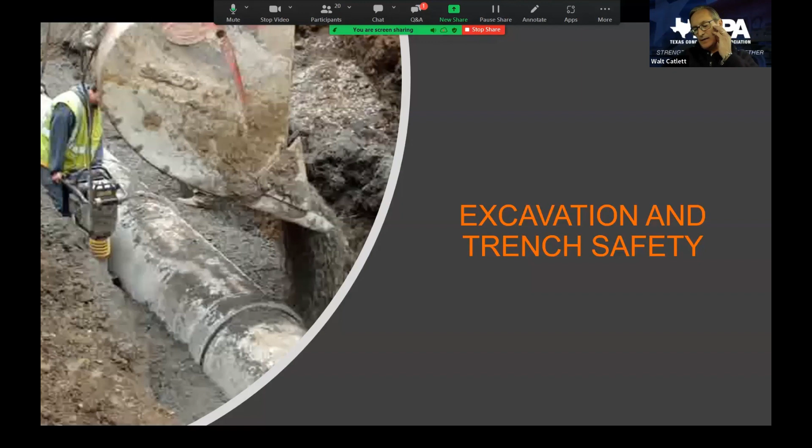As Mark said, I'm with the Texas Concrete Pipe Association, and I am a certified safety and health official with OSHA on the construction industry side. So the items we're going to be talking about come from OSHA, and I'm going to highlight a few things as we go along that point us to the federal document this information comes from.

So often we are out on the job site or in a classroom and someone asks us, at what depth do we need protective measures in place per OSHA? And we get all kinds of answers, a couple of different answers. So what I want to do today is raise our awareness about that and make it so we're comfortable with that conversation. Here are our learning outcomes I want to accomplish today.

We're going to describe the differences between an excavation and a trench. I would think most of us on this call would know that, but that's one of our outcomes. Describe the dangers of trenching and excavation operations. Identify steps to avoid hitting underground utility lines. Describe protective systems, explain requirements for safety when installing and removing protective systems, and describe other excavation hazards. So those are our learning outcomes.

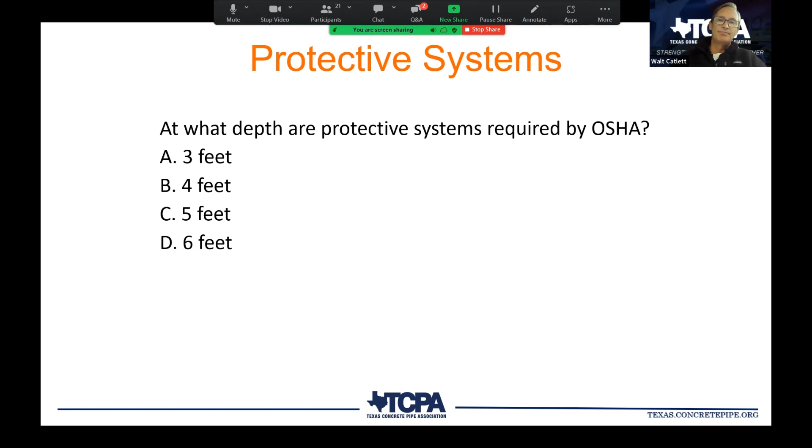If you haven't ever done that, at the bottom of the page you'll see an icon for chat. Click on it and you can type your answer in there. Mark and Mike, let me know if I need to touch on anything there. At some point during the presentation, we'll get back to that. So we had a couple people answer, and we have more than that in the room. So y'all step out there and be brave and go ahead and throw an answer for the heck of it.

1926.650, .651, and .652. Then it has appendices A through F, and I just kind of lumped those together.

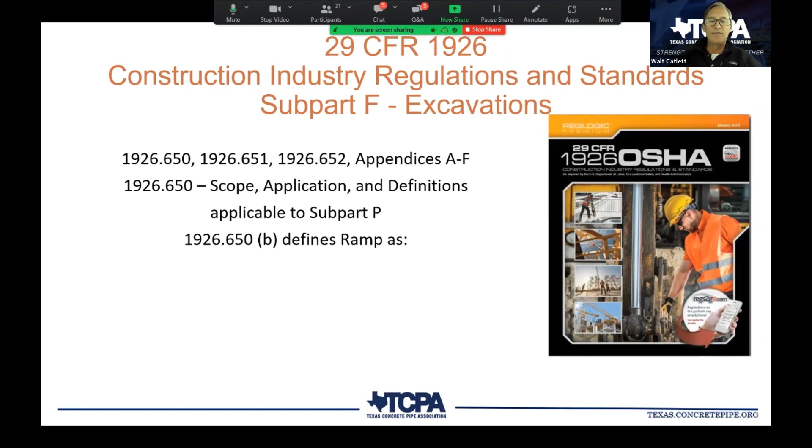Within 650, 1926.650, they address the scope, application, and definitions applicable to subpart P. So there'll be a handful of definitions: trench, competent person, hazards, just some basic things that apply to trenching. They even have a definition of a ramp. Now, if we were in a classroom and I were to ask you, the group, give me your own definition of a ramp, we'd get all kinds of different answers. And here's OSHA's answer: a ramp means an inclined walking and working surface that is used to gain access from one point to another. You can see what it can be constructed of. Typically, when we think of a ramp, it might be earthen, made of earth materials. But anyway, here's their definition within 1926.650.

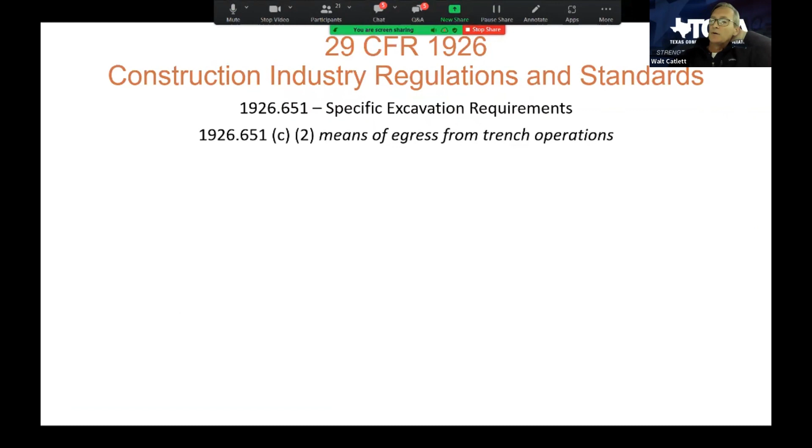Within 1926.651, they're going to touch on specific excavation requirements. So sometimes when I ask the question, at what depth do we need to have protective measures, a lot of times people will say, probably a 50-50 split, they'll say 4 feet, or they'll say 5 feet. And so I always say, well, you're kind of both right. But the reality is, at 4 feet, OSHA tells us we have to have a means of egress from a trench operation.

And here you see it before us, straight out of 29 CFR 1926 subpart P: a stairway, ladder, ramp, or other safe means of egress shall be located in trench excavations that are 4 feet or more in depth, so as to require no more than 25 feet of lateral travel for employees. So what OSHA is telling us right there is, if I have a trench and it's 4 feet or greater, I've got to have a means of getting in or getting out of that trench.

It could be a ladder, or it could be a stairway. And that means of getting in and getting out of the trench can be no further than 25 feet from me. So if I got a 50-foot trench, or if I have a 60-foot trench, I'm gonna have to have a couple ladders in that trench to get in and get out safely. And we've all been out on the job site and seen trenches lengthy with probably only one means of getting in and getting out. OSHA tells us every 25 feet we need to have that ability.

All right, that was 1926.651. There's a bunch of other things in there. Now I'm going over to 652, and these are the requirements for protective systems. So 651 covered the means of getting in and out of a trench, and that's at 4 feet and greater. OSHA tells us for protection of employees in excavations, each employee in an excavation shall be protected from cave-ins by an adequate protective system, except when the excavation is made entirely in stable rock or the excavations are less than 5 feet in depth.

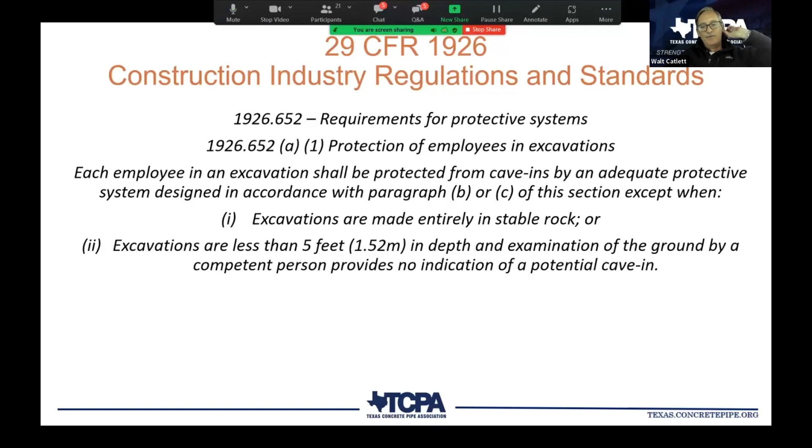An examination of the ground by a competent person provides no indication of a potential cave-in. So there's our answer: at 5 feet or more, OSHA tells us we should have protective systems in place. 5 feet or more. Now keep in mind that OSHA standards are minimal standards, those are the minimums. So a local agency can say, well, okay, OSHA says 5, but we want it to be 4 foot because of these reasons. They can make the standard more conservative, they just can't make it less conservative. 5 feet or more, you'll try to remember that because you'll be asked again in the future.

All right, then within Appendix B, you've got appendices A through F. I'm just throwing some things up there for us to look at. Within Appendix B, under the sloping and benching configurations, which are 2 protective measures, sloping being one and benching being another, you can see what they're telling us the configuration of our slope and or bench system should be. So sloping here, they're telling us in a type A soil it has to be 3/4 to 1. Type B is 1 to 1, and type C is 1.5 to 1. And we'll go over those different soil classifications during the presentation.

And so what that's telling us is for every 9 inches of horizontal distance, I've got to have 12 inches of depth for type A.

And for type C, for every 1.5 foot out horizontally, I can go down 1 foot, or up depending on how you're looking at that. All right, so those are our slope configurations.

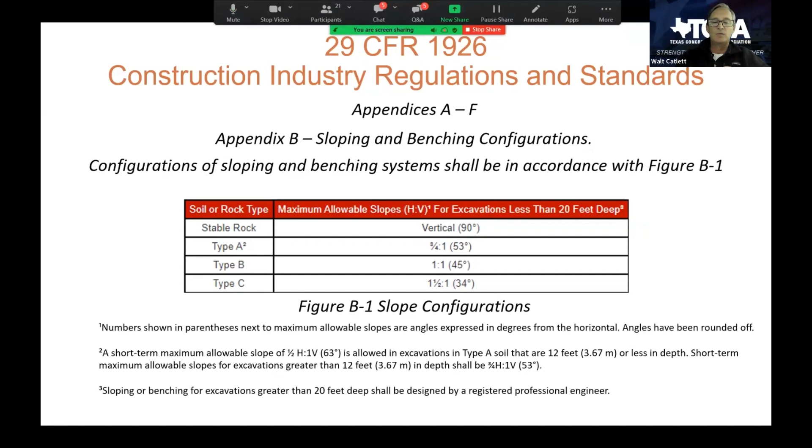And then within that appendices, these notes are below it as well. There's 2 key notes here, well, 3 I guess, but the one at the bottom is what I want to focus your attention on: sloping or benching for excavations greater than 20 feet deep shall be designed by a registered professional engineer. 20 feet, greater than 20 feet, we have to have a PE design our sloping or benching for excavations. So that's worth noting as well, that's another dimension worth capturing.

Is the excavation more than 5 feet in depth, yes or no? If the answer is no, then I check: is there potential for cave-in? If the answer remains no, then excavation may be made with vertical sides, less than 5 feet in depth. If the answer is yes, they're going to have to slope, shore, or shield that trench.

So I'll have to put some type of protective measure in place. If we select sloping, then we'll go to figure 2, and it walks us through the different things for sloping, and it's all based on soil classification, whether it's type A, type B, or type C soil. And then our other options are shoring and shielding, shielding being another term for what we'd be familiar with as trench boxes. All right, so those are our 4 protective measures: sloping, benching, shoring, and shielding.

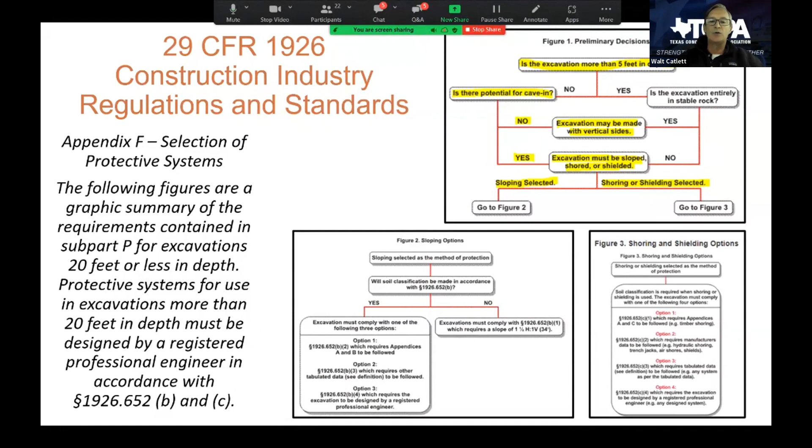All right, so that's 29 CFR 1926, some of the items that are in subpart P. P as in Papa. All right.

So what is a trench and what is an excavation? A trench is defined as a narrow excavation made below the surface of the ground. In general, the depth of the trench is greater than its width, but the width of a trench is no greater than 15 feet. This is all laid out in OSHA's manual. We all would say, well, anybody knows that. Well, OSHA feels it's important to define it. And if OSHA feels it's important, I guess if we're in the world of installing pipe or out inspecting our job sites that we've designed, we probably should be familiar with that terminology as well.

There's a handful of hazards that we are exposed to when we go out into the field and there's trenching or excavation. The biggest one here is cave-ins. Cave-ins certainly pose the greatest risk and are more likely than some other excavation-related incidents that result in worker fatalities.

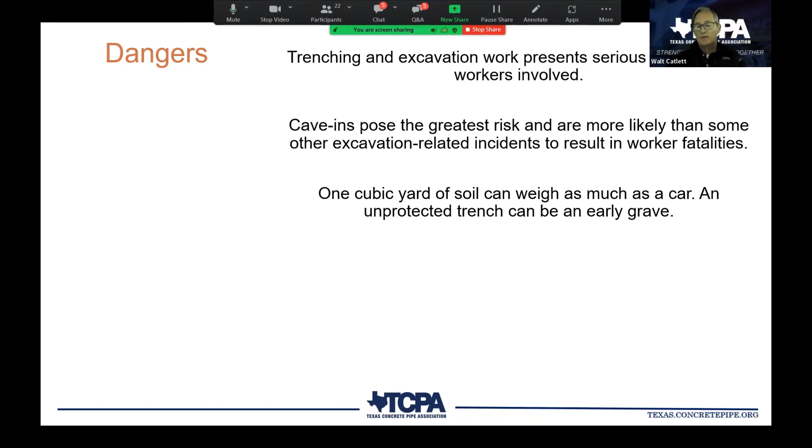I'm sure a handful of you have heard this before, but 1 cubic yard of soil... so if I'm in a trench and it's 4 foot in depth, I don't have to have protective measures. If a competent person said, 'Yep, we're good on the 5 foot deal because it's 4 foot and the soil's stable enough,' we're comfortable with that.

And then I bend down to pick up a tool, and I got a 3 foot wall of dirt that falls on top of me. I'm in a serious situation because I have about 3,000 pounds, a bit more than 3,000 pounds on top of me. So that's pretty tough. We got to make sure our employers ensure workers enter trenches only after adequate protective measures are in place. This is a big one.

I come from the concrete pipe world, and suspended loads are something I see on the job site every time I go to the field. And an 8 foot long by 36-inch diameter pipe, if that chain or strap or cable snaps and it falls and drops on top of this person, we're going to have a fatality on the job.

So if you're out in the field and you see someone underneath a suspended load, point it out to them, and you may potentially save their life, or you may prevent them from a life-changing accident.

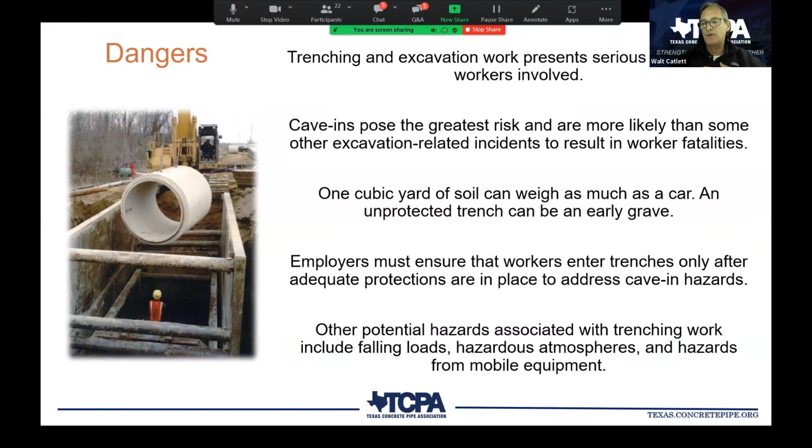All right, so what do the standards cover, and how do they protect workers? We're going to walk through that.

The whole reason we have OSHA is to protect the American workforce. That's what it's there for. It came about in 1972. Richard Nixon and the Congress at the time signed it into law. And so since '72, 50 years ago, we signed it into law, and we've had OSHA since then. And it was set up to protect the American workforce.

I don't really show it on here, but this is a good takeaway. OSHA has what's called the General Duty Clause, written within the standard. It basically tells us that employers have the responsibility to make sure the workplace is safe for their employees. We call that the General Duty Clause, and there are two parts to it: the employer part and the employee part. The second part is that the employee, him or herself, is responsible for following all the rules and regulations that are in place to make the workplace safe. So the employer has a responsibility, as does the employee.

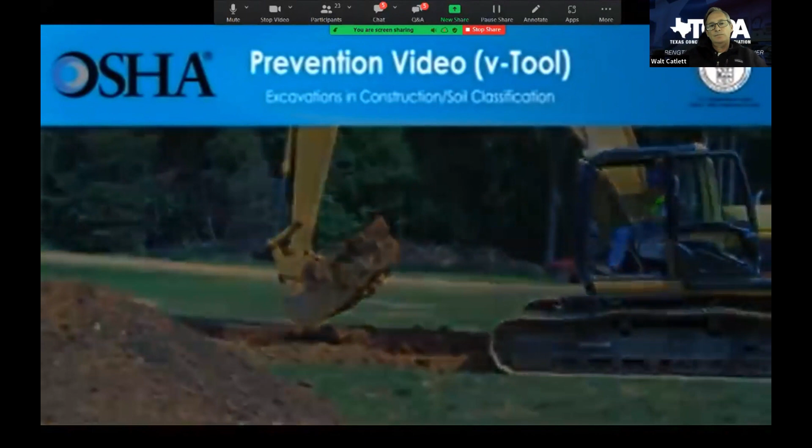In the U.S., more than 800 construction workers die every year while on the job. One of the most dangerous types of construction work is trenching, which kills 40 construction workers every year. Workers can suffer death or serious injury within minutes of being caught in a trench cave-in. But these deaths can be prevented. The video you're about to see shows one of the steps, classifying soil, that employers must follow so that trenching work can be done safely.

This video is not intended to be a complete educational tool. Instead, it is meant as an introduction for people who want to know more. Employers have a responsibility to provide a safe workplace and required protective equipment. You'll learn how having the right information about a construction site can help save lives.

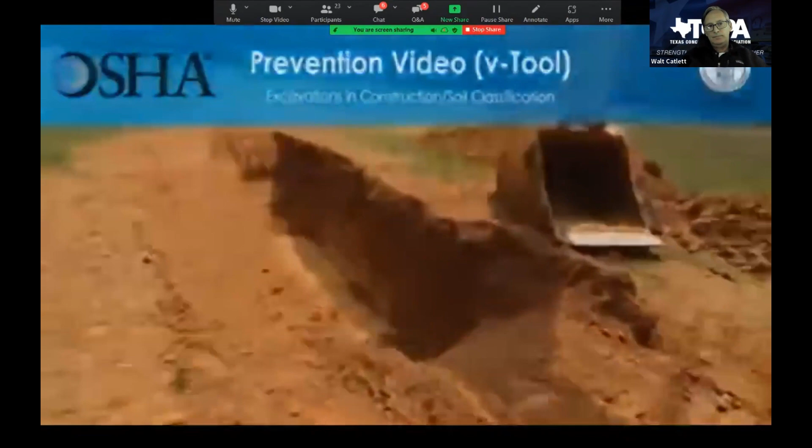Each employee who enters a trench must be protected from cave-ins by a protective system if the excavation is 5 feet or greater in depth, unless it is dug into stable rock. A support system is not required if the trench is less than 5 feet in depth and an examination of the ground by a competent person provides no indication of a potential cave-in.

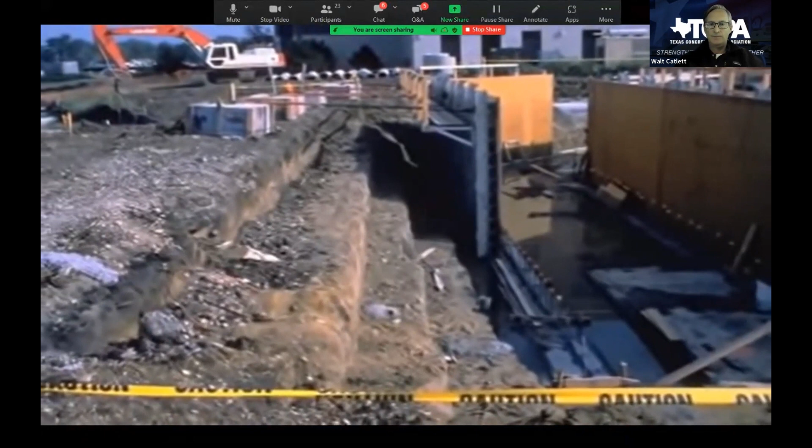One cubic yard of soil can weigh as much as a car, 3,000 pounds, and comes in many varieties. Some types of soil are stable and some are not. When digging a trench, it's important to know the type of soil you're working with so you know how to properly slope, bench, or shore the trench. This can help prevent a cave-in.

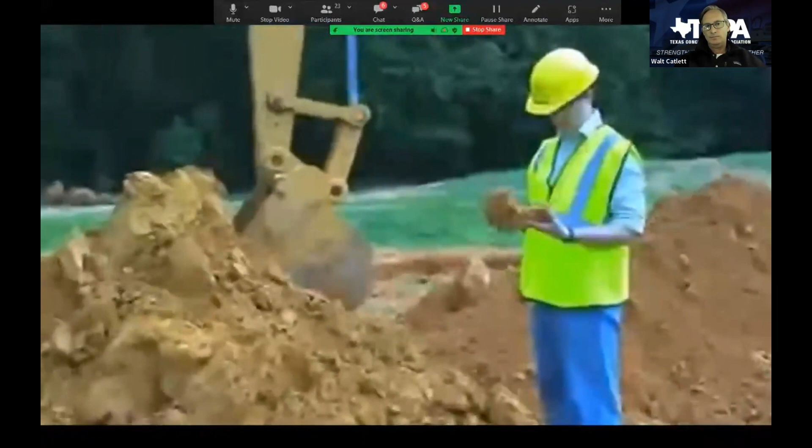OSHA requires that employers have a competent person to determine the soil type. A competent person is someone who can identify conditions that are hazardous to employees and who also has the authorization to correct these hazards. Anyone digging 5 feet or deeper must follow OSHA's rules.

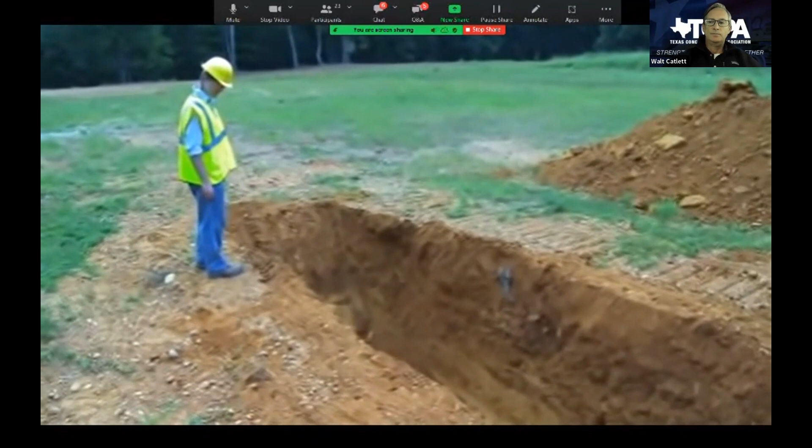The appendices of the OSHA excavation standard show the various types of support systems that may be used, up to a maximum depth of 20 feet. Any excavation deeper than 20 feet must use a protective system approved by a professional engineer. For all excavations, a competent person must conduct a full inspection every day, or when any trench conditions change, to identify and remove any potential hazards.

In this video, you'll see how a visual inspection of a construction site's soil is performed. You will also see how to test the soil using 3 of the most common methods: the plasticity test, the thumb penetration test, and the pocket penetrometer test. For best results, OSHA recommends that the competent person use more than one of these methods to test the soil.

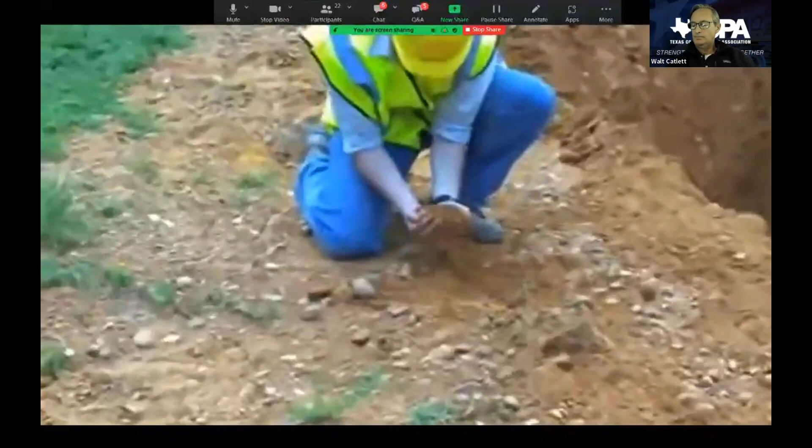Knowing the type of soil makes it possible to determine the right protective system to keep workers safe when they're working in an excavation. Soil can either be cohesive or granular. Cohesive soil contains fine particles and enough clay so that the soil will stick to itself. The more cohesive the soil, the more clay it has, and the less likely a cave-in will happen. Granular soils are made of coarse particles, such as sand or gravel, and will not stick to itself. The less cohesive the soil, the greater the measures needed to prevent a cave-in.

OSHA uses a measurement called unconfined compressive strength to classify each type of soil. This is the amount of pressure that will cause the soil to collapse.

This value is usually reported in units of tons per square foot. Soils can be classified as Type A, Type B, or Type C.

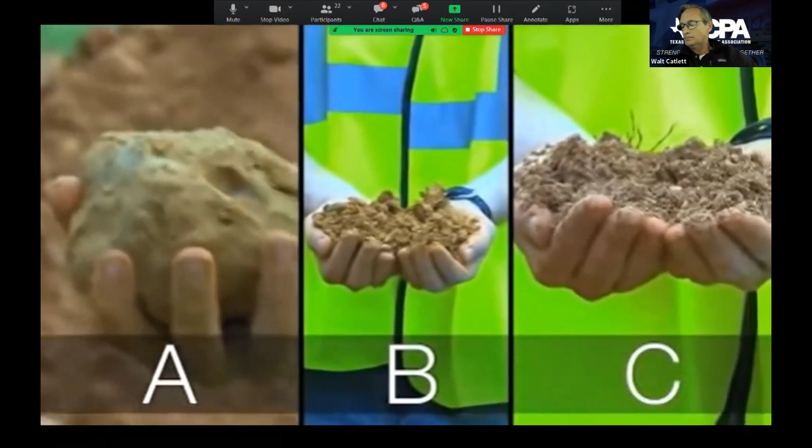Type A soil is the most stable soil in which to excavate, while Type C is the least stable. It's important to remember that a trench can be cut through more than one type of soil. Let's look at each type of soil.

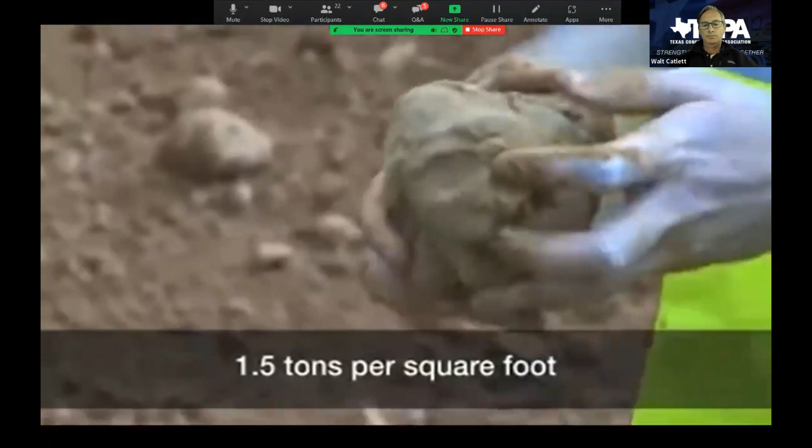Type A soil is cohesive and has a high unconfined compressive strength, 1.5 tons per square foot or greater. Examples of Type A soil include clay, silty clay, sandy clay, and clay loam.

Soil cannot be classified as Type A if it is fissured, if it has been previously disturbed, if it has water seeping through it, or if it is subject to vibration from sources such as heavy traffic or pile drivers.

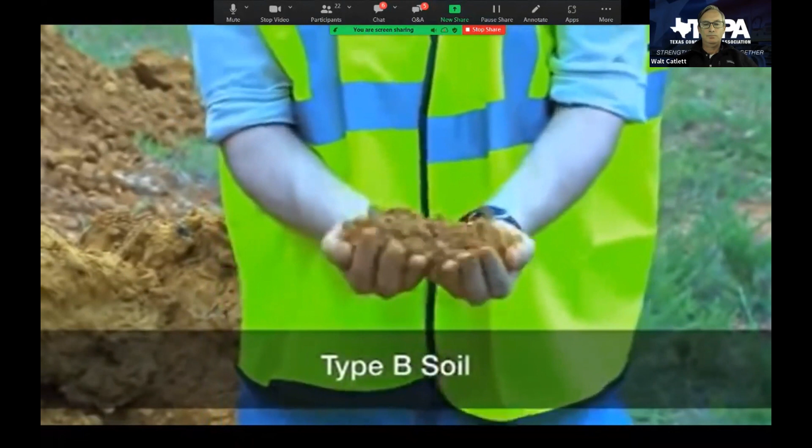Type B soil is cohesive and has often been cracked or disturbed, with pieces that don't stick together, as well as Type A soil. Type B soil has medium unconfined compressive strength, between 0.5 and 1.5 tons per square foot.

Examples of Type B soil include angular gravel, silt, silt loam, and soils that are fissured or near sources of vibration, but could otherwise be Type A.

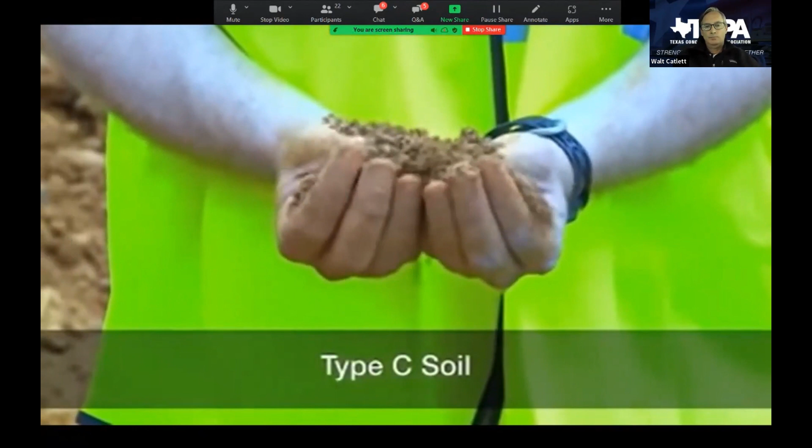Type C soil is the least stable type of soil. Type C includes granular soils in which particles don't stick together, and cohesive soils with a low unconfined compressive strength, 0.5 tons per square foot or less.

Examples of Type C soil include gravel and sand. Because it is not stable, soil with water seeping through it is also automatically classified as Type C soil, regardless of its other characteristics. Before testing the soil, it's useful to perform a visual test of the construction site.

This will help determine if there are factors on site that will lower the strength of the soil. Here are some observations to make when performing a preliminary visual test of the soil around an excavation site.

First, as the soil is being excavated, does it come out in clumps or is it granular? Clumps mean that the soil is cohesive. Are there sources of vibration near the excavation? Are there signs of previously disturbed soil, such as utility lines?

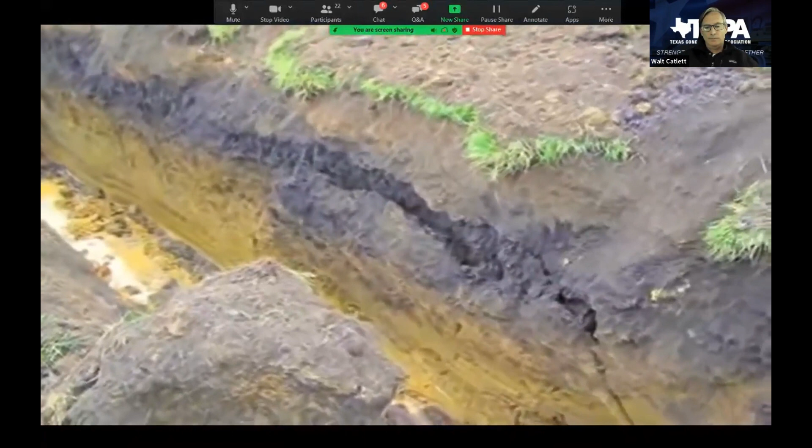Are there signs of water seeping through the soil? Is the soil fissured? Signs of fissuring include crack-like openings or chunks of soil that crumble off the side of a vertical excavation wall.

If any of these conditions are met, the soil cannot be classified as Type A. When performing a soil test, it's important to choose a good soil sample. Soil samples should be typical of the surrounding soil in the excavation, and additional samples should be taken as the excavation gets deeper.

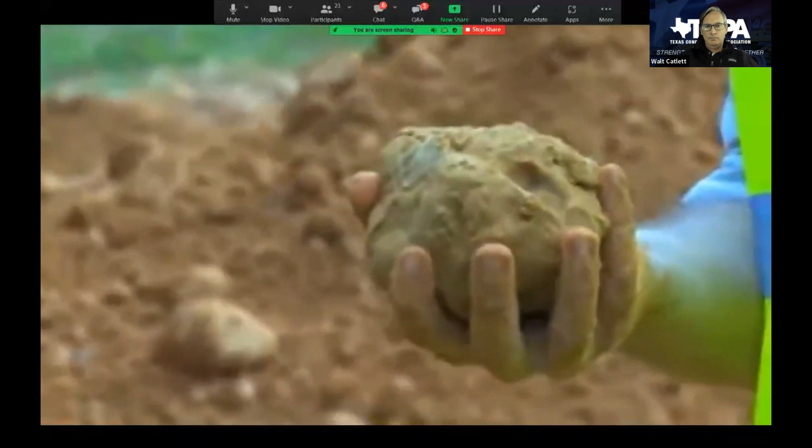While the excavation wall is one place to take samples, OSHA recommends taking a large clump from the excavated pile, as long as the soil in the pile is fresh and hasn't been compacted.

Test results can change as the soil dries out, so for the best results, samples should be taken and tested as soon as practical. Now let's look at the three main types of soil tests.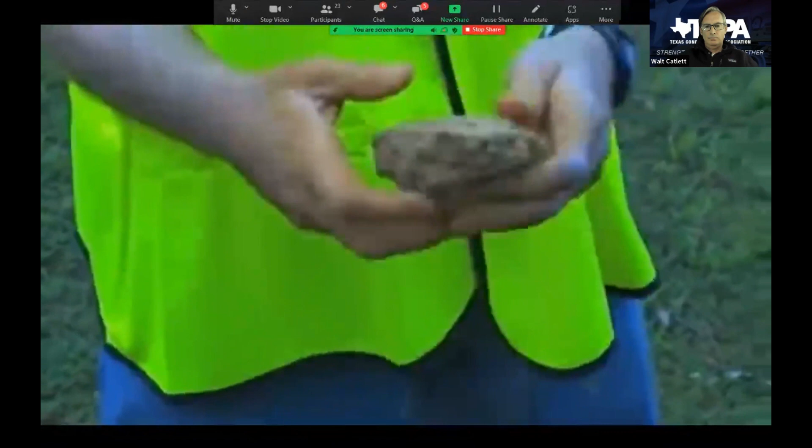The plasticity test, which is sometimes called the pencil test, is used to determine if the soil is cohesive. This test is performed by rolling a moist soil sample into a thread that's 1/8 of an inch thick and 2 inches long, resembling a short, slim pencil.

If the sample can be held at one end without breaking, it is cohesive. Here's an example of what the results will look like if the soil is cohesive. Notice how the sample stays in one piece.

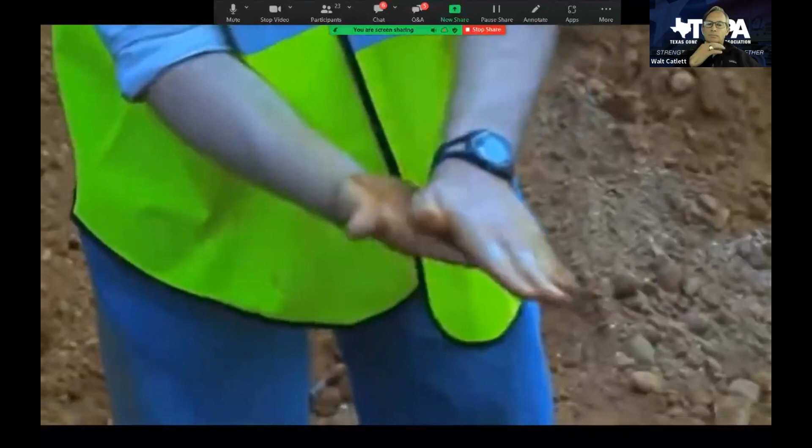Now look at what happens when the soil is not cohesive. The soil doesn't have the strength to hold itself together. Any soil that is not cohesive is automatically classified as Type C, although some Type C soils are cohesive.

The thumb penetration test is used to quickly estimate the compressive strength of a cohesive soil sample. To perform the thumb penetration test, simply press the end of your thumb into a fresh clump of soil. If the soil sample is Type A, your thumb will only make an indentation in the soil with great effort.

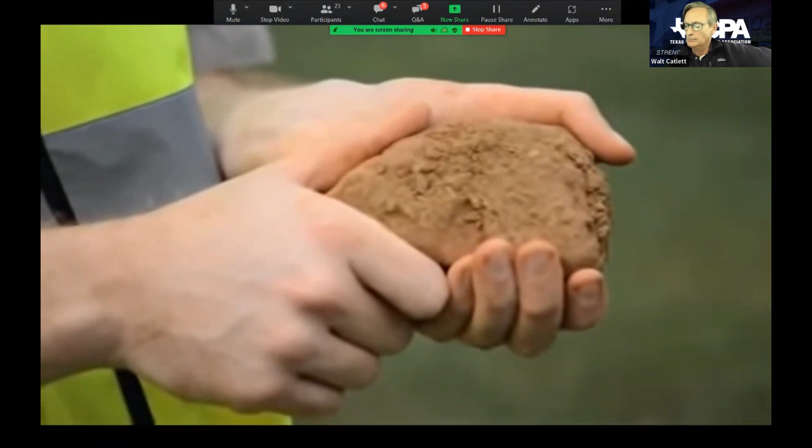As you can see demonstrated here, if the soil sample is Type B, your thumb will sink into the soil up to the end of your thumbnail, just like this. If the soil sample is Type C, your thumb will sink all the way into the soil clump.

As you can see here, your results for this test will probably be somewhere in between these results.

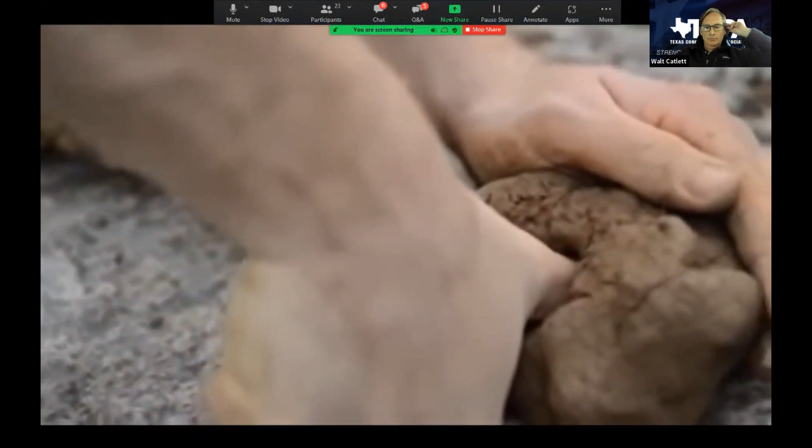For a more numeric measurement, the pocket penetrometer test can be used. A soil's compressive strength can be given a numeric value by using the pocket penetrometer test.

There can be some variability in these results, so it's a good idea to run this test on a few soil samples from the same part of the excavation, just to make sure your results are consistent.

A pocket penetrometer works much like a tire pressure gauge. A thin metal piston is pushed into a soil sample, and the penetrometer records the compressive strength of the soil. Be sure that the scale indicator is inserted into the penetrometer body until only the 0 mark is showing. To conduct the test, push the piston into the soil until it reaches the engraved line. Then simply take the reading from the scale indicator.

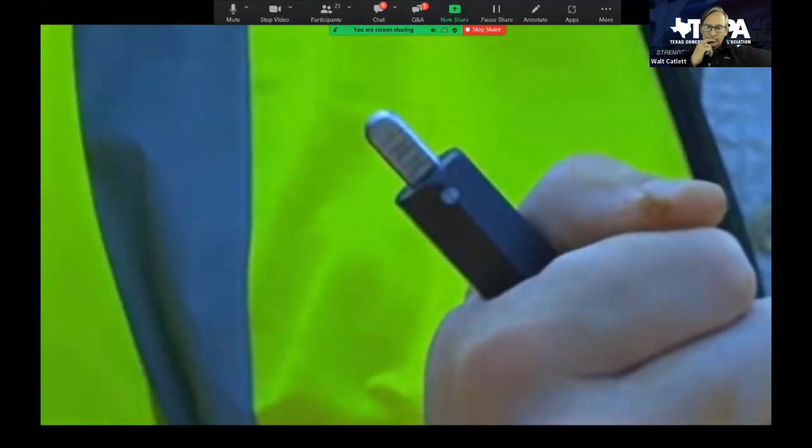It's important to recognize that a penetrometer may give false results if the soil contains rocks or pebbles, which won't compress. As you can see, type A soil will measure at least 1.5 tons per square foot. Be aware, however, that you can't classify a soil as type A if the excavation site didn't meet all the conditions of the visual test, if it is granular, near a source of vibration, or there are signs of previously disturbed soil, water seepage, or fissured soil.

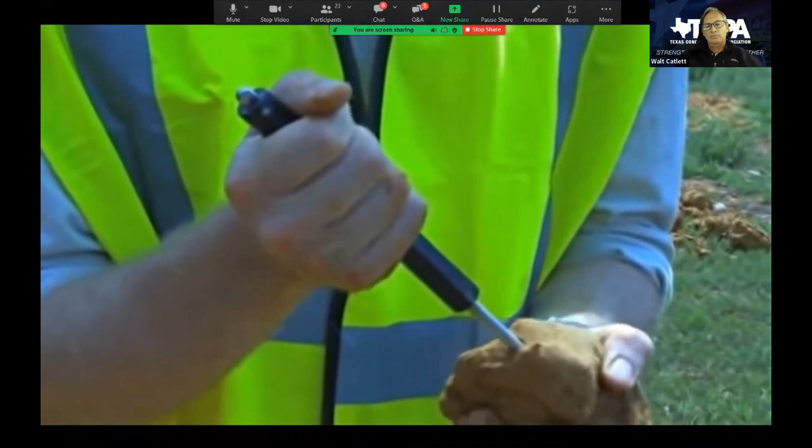For type B soil, the reading will be between 0.5 and 1.5 tons per square foot. Type C soils are equal to or less than 0.5 tons per square foot.

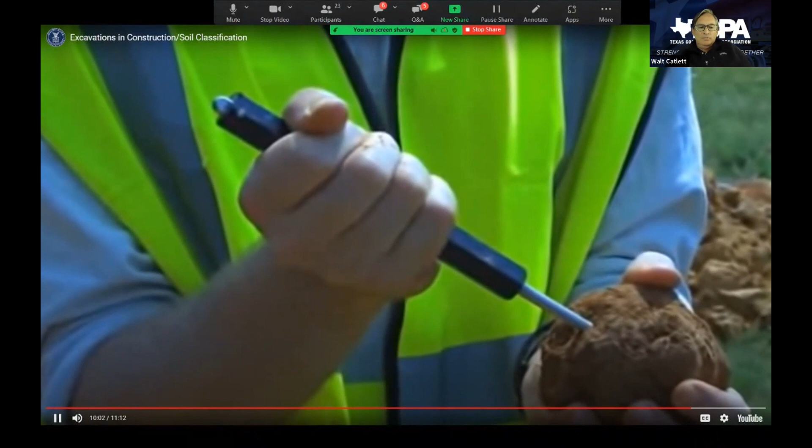Let's review the main points from the video. OSHA classifies soils into three main groups.

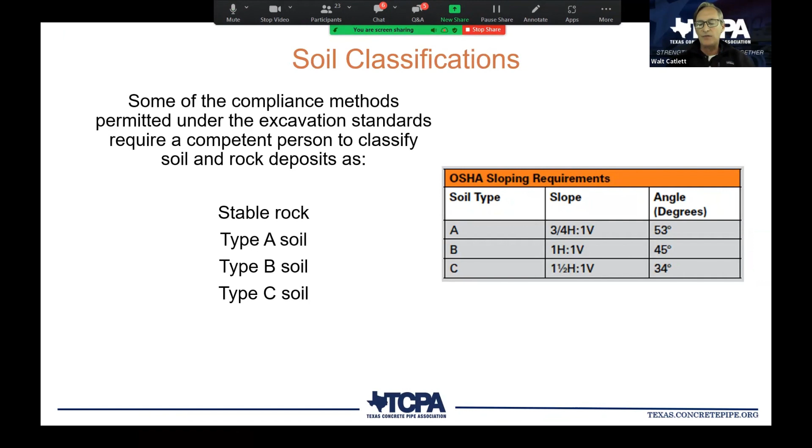All right, so I'm just going to summarize the video real quick. So here we have soil classifications, and from the video you saw type A, type B, type C. There's our sloping requirements, and we'll talk about that when we get to protective measures.

And here's another way to look at those sloping requirements. You can see the type C soil is the least cohesive because it requires a flatter slope than the type B and especially the type A. So type A is 3/4 to 1, B is 1 to 1, C is 1.5 to 1.

Thumb penetration test. If we take a sample of the soil right after it's been excavated, we want to get a sample that represents the soil that has come out of the trench. So if you have different types of soil, you're going to have to go with the weaker of the samples, the weaker of the soil, right? Because that's going to give you the most conservative approach to safety.

But if we take our soil sample, it's an unconfined compressive strength test. So we just clump that thing together with our two hands. We shove our thumb in it. If our thumb makes an indentation, then you've got a type A. If our thumb goes all the way to the depth of the thumbnail, you've got a type B. And if our thumb goes all the way into it, you've got a type C.

You see there, this is a subjective test. And they say here it's the least accurate of the three. This is one of our tests.

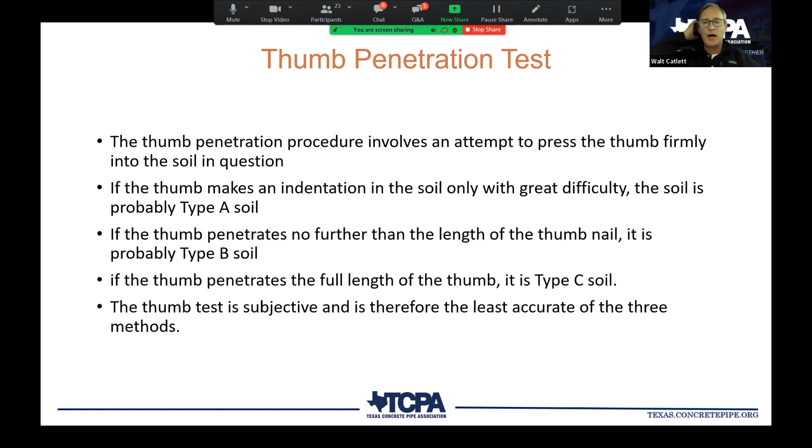The other one that we always do when we go out to the job site, you might say we don't even realize we're doing, is the visual test. We're watching that soil come out of the trench, and we can tell right off the bat if it's a cohesive or a non-cohesive soil, by the way it spills out of the bucket of the track hoe or the backhoe.

Type B is 0.5 to 1.5 tons per square foot. And there's some examples of the soils that fall in that category. And then items that cause it to go from a type B to a type C, just like a type A—if it meets type B, but it's been disturbed, we're going to downgrade it to a type C. And then you see the other ones there as well.

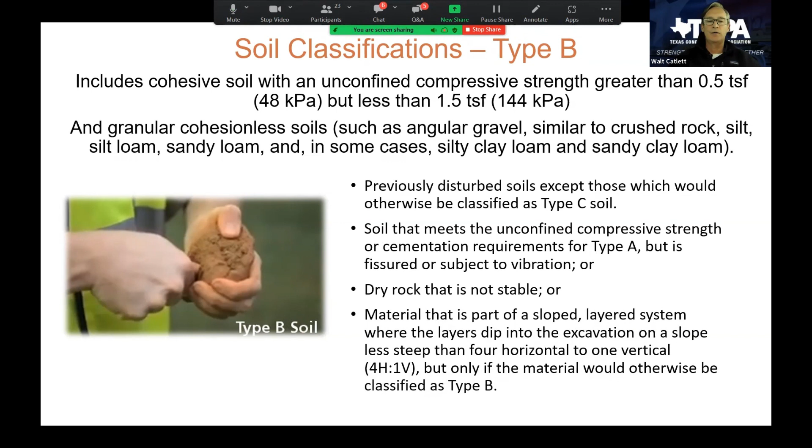For our type C soil, it's going to be less than 0.5 tons per square foot. A cohesive soil can be a type C, but generally we're looking at granular soils and other items that cause us to classify soil as type C.

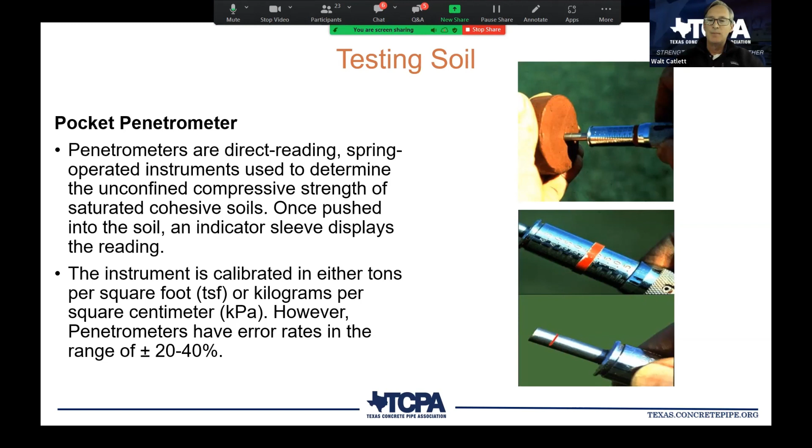Here's our pocket penetrometer. It's a direct reading, spring operated instrument. You zero out the piston, then push the rod into your soil sample until you reach a mark on the tool, and that'll be called out. Pocket penetrometers have an error rate in the range of 20 to 40%, so none of this is really precise, but it does give us a feel for whether we're in the range of a type A, type B, or type C soil.

I think this is our last test, the plasticity test, also called the wet thread test or the pencil test. You take a sample of soil, roll it in your fingers to about 1/8 of an inch in diameter and about 2 inches long. Then hold that vertically, and if it stays together, it's classified as cohesive. If it falls apart, it's a non-cohesive soil.

Another key player on the job site as it pertains to trenching and excavation is the competent person. That's someone designated by the employer who has the capability of identifying existing or predictable hazards and is authorized to take prompt corrective measures to eliminate them.

Depending on what work we're doing, the requirements for a competent person differ. If we're doing scaffolding, that's a different requirement than if we're in trenches. Per OSHA, a competent person has to be able to classify soil, inspect protective systems, design structural ramps, have the ability to monitor water removal equipment, and have the ability to conduct a site inspection properly.

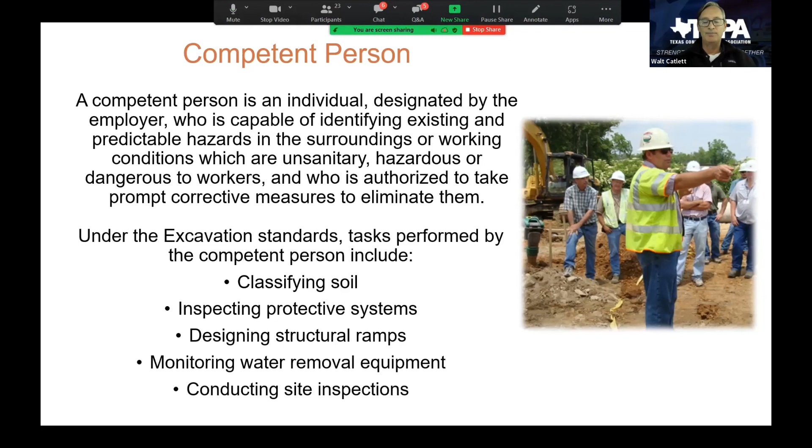So those were our ways for classifying soil. If we were in class together, I'd have us sit down and go over it together as a group, making you communicate that back to me. So consider yourself doing that right now. Have fun with it for a second.

All right, pre-planning is so important. I do a lot of training with road crews at the county and city level, and with contractors as well. We talk about before going to the field: are you having a meeting to talk about what you're about to do? That's so important. They generally say yes, we do that, talking about the task for the day, who's going to do what, what hazards are out there, and what equipment we need.

I would just reiterate that to everyone: make sure you do some pre-planning before you go to the field, whether you're just going out to inspect your job site, or you're actually out there every day doing certain tasks. Pre-plan beforehand, there are benefits to it, and you see some of those here at the bottom of the slide.

If we don't plan, and we have to stop or correct something in the field, it's going to slow down our operation, add cost to it, and make a cave-in or other excavation failure more likely. The bigger issue to me is it's going to force us to potentially compromise or take an easier route than what we should be doing if we had planned properly.

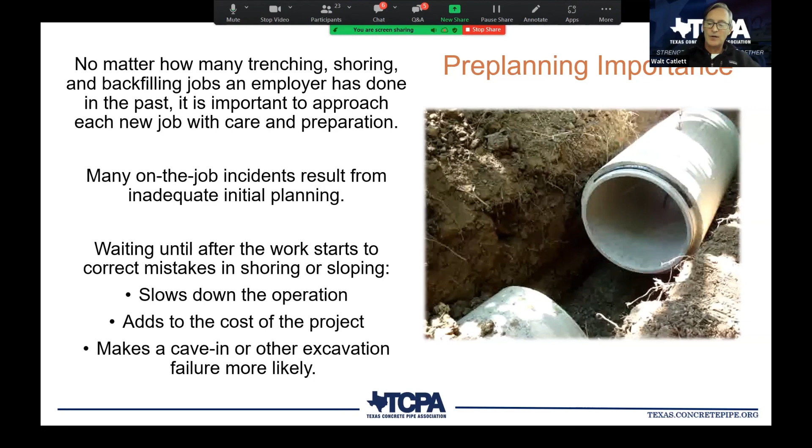Convenience is a horrible thing, and as it pertains to why incidents happen, it really comes down to inconvenience. It wasn't convenient for me to go back to the job site or back to the workshop, and because of that, we had a trench collapse, or we used the tool we shouldn't have been using, and something occurred.

We all know we've got to make sure we're doing excavations properly. We've got to contact our utility providers, let them know what's going on, and get them to come out and locate the utilities before we start digging. That's something we always talk about with excavations, so we've got to do it. Until we get them out there and those lines are marked, we're on pause. That's another planning thing - we make the call at a time that doesn't interrupt our schedule.

Now we're going to talk a little bit about protective systems. Five workers were putting a sewer pipe into the bottom of a trench with a ladder nearby to enter the trench. There was nothing in place to protect the workers inside if the walls collapsed. While the workers were inside the trench, one side began to collapse. Two workers were able to climb out using the ladder, but the other three were buried in the soil and unfortunately suffocated to death from the weight of the soil.

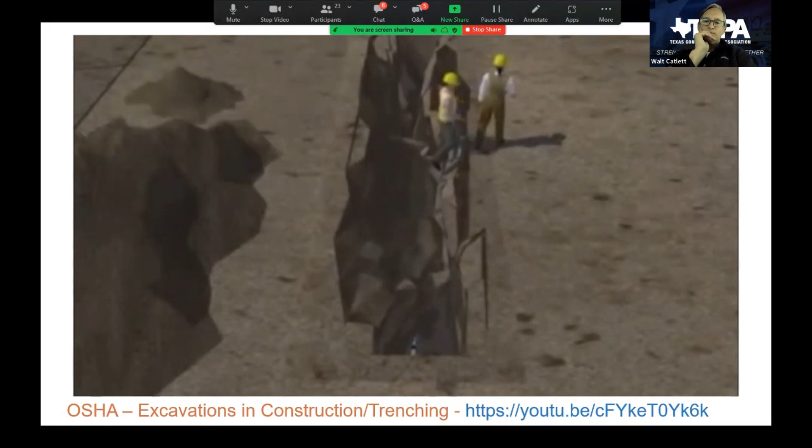Let's look at the events leading up to this tragic incident and see how it could have been prevented. Employers must follow OSHA rules to protect workers in trenches. However, here the employer did not follow OSHA's rules, which led to these workers losing their lives. Let's go over the main points of OSHA's rules for trenches to see how to keep workers safe.

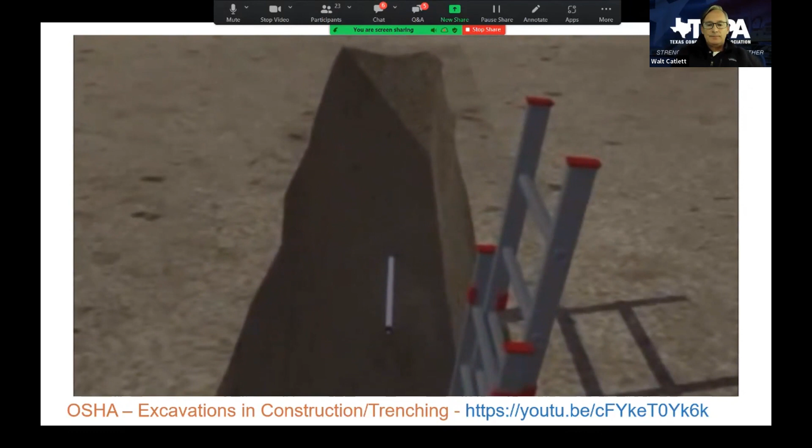All trenches must follow OSHA's rules. One cubic yard of soil can weigh as much as a car, nearly 3,000 pounds. So unless the trench is cut entirely into stable rock, protection against cave-ins must be used for all trenches more than 5 feet deep, or for any trench that shows signs of cave-in.

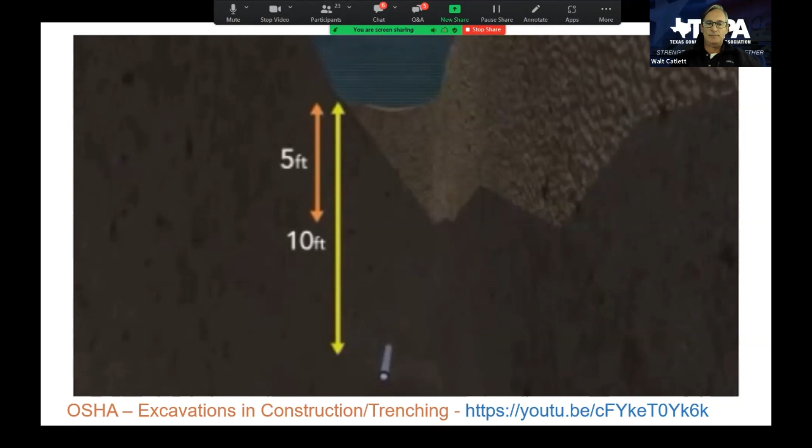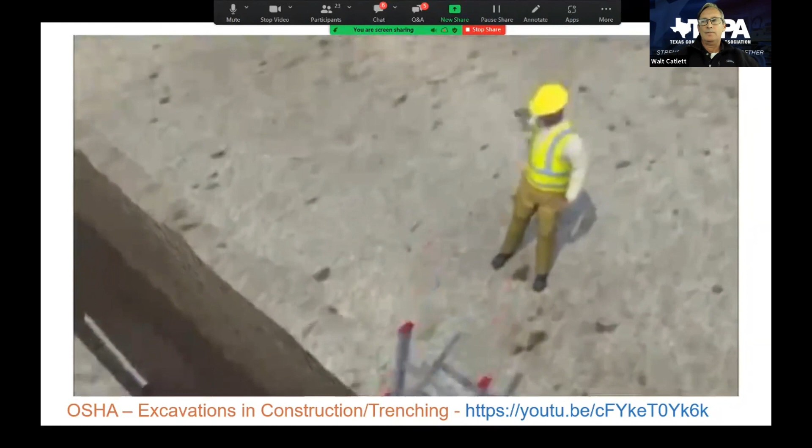Before workers can do any work in a trench, a competent person must conduct an inspection to identify and remove any potential hazards. A competent person is someone who can recognize hazards in the area and who has authority to take quick action to eliminate the hazard, which may include temporarily stopping the work. Inspections must be performed at the start of every shift, after a rainstorm, or whenever conditions change.

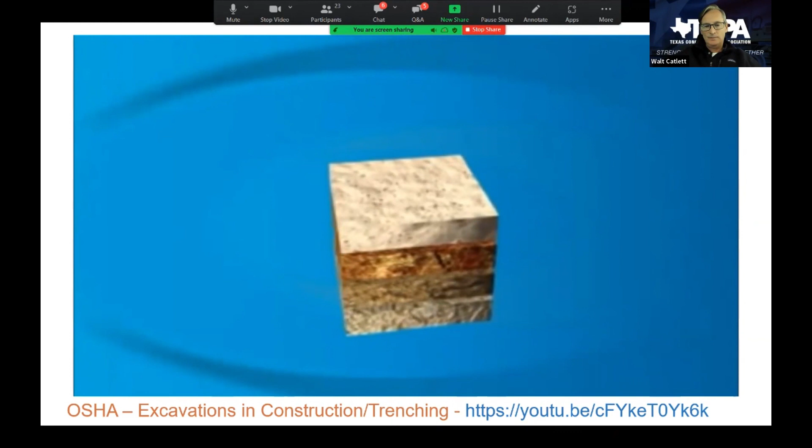The competent person must also test the soil in a trench. OSHA requires at least one test by looking at the soil and at least one test by hand. If a person knows the soil types, they can pick the right protective system to keep workers safe when they're in trenches. OSHA classifies soil in a trench as stable rock, Type A, Type B, or Type C soil.

Stable rock is the safest soil for a trench. Type A is the next most stable, then Type B, and finally Type C soil is the least stable. It's important to remember that trenches can have different types of soil based on depth and climate conditions. The competent person can choose from different protective systems for a trench based on the types of soil found.

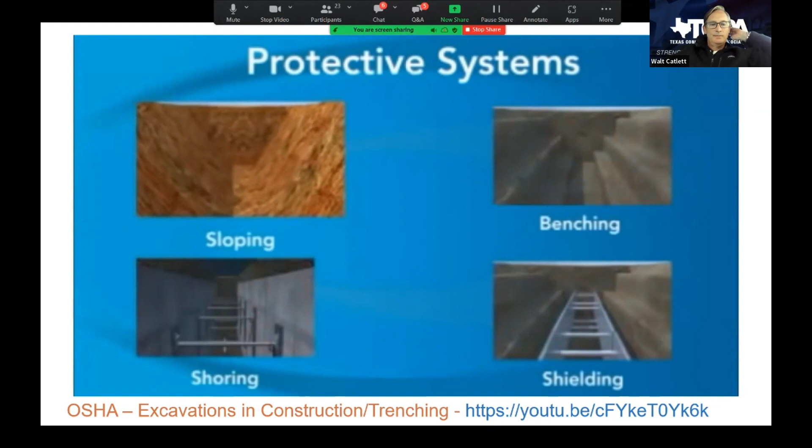For all trenches deeper than 5 feet, or for any trench that shows signs of cave-in, OSHA requires sloping, benching, shoring, or shielding to protect workers from cave-ins. Let's review each of these systems and then see how each one could be applied to the cave-in incident shown earlier. We'll look at sloping first.

Sloping protects workers by cutting back the sides of the trench so the sides slant away from the trench. OSHA's rules identify the degree of slope allowed for each of the different soil types. When trenches are less than 20 feet deep, these are the basic maximum allowable slopes for each soil type.

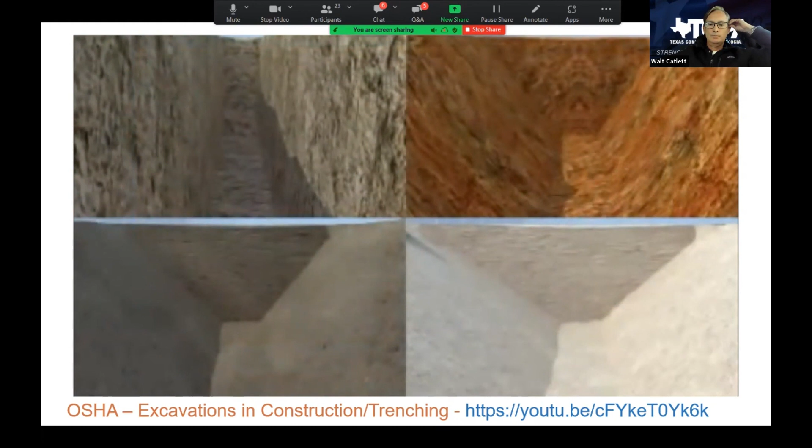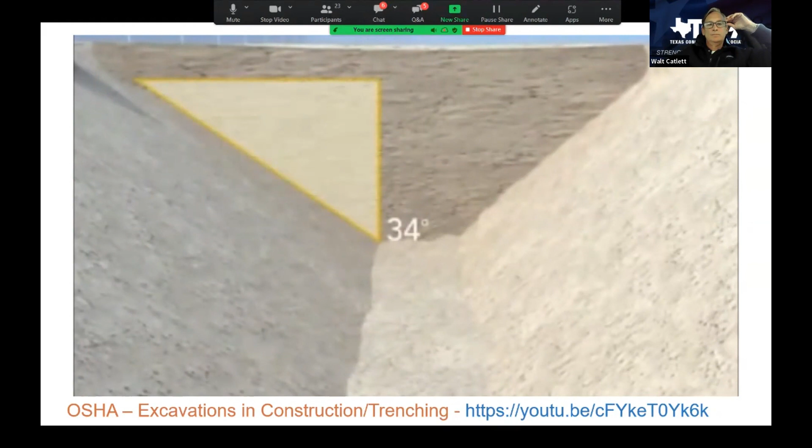Stable rock can be vertical walls, but cannot be undercut. For Type A soil, OSHA requires that the walls be sloped 9 inches out for every 1 foot of trench depth. For Type B soil, OSHA requires that the walls be sloped 1 foot out for every 1 foot of trench depth. For Type C soil, OSHA requires that the walls be sloped 18 inches out for every 1 foot of trench depth. This kind of sloping can only be used for trenches less than 20 feet deep - any deeper, and the protection must be designed by a registered professional engineer.

Now let's look at the workers in the original scene who were stuck in the trench as it started to cave in. But this time, the soil has been classified as Type B. The trench has been properly sloped, and the spoil pile is moved away from the edges of the trench.

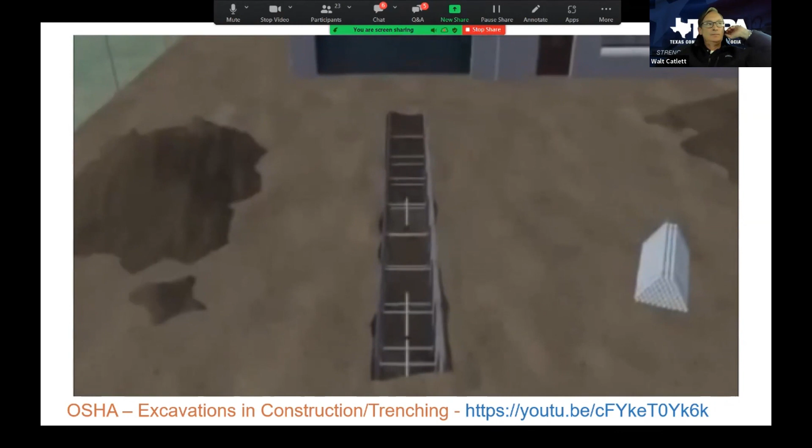The trench walls are not caving in, and the workers are safe while they work. Now let's review the shoring type of protective system for trench workers. Shoring uses various support systems to prevent soil and the trench walls from moving.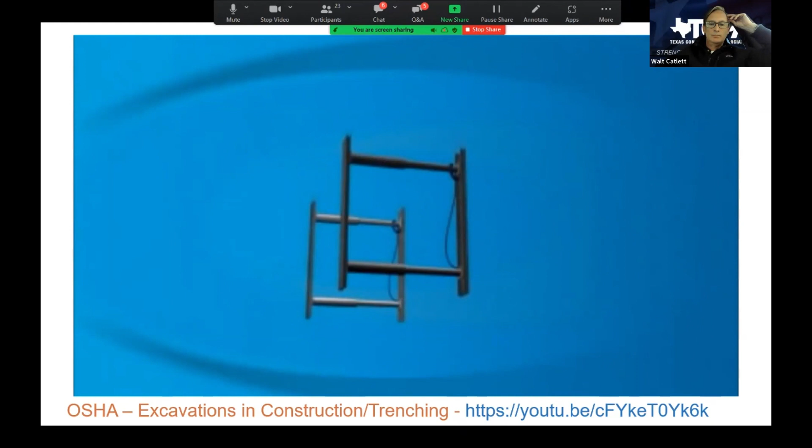There are different kinds of shoring systems, but timber and aluminum hydraulic are the two basic types. Aluminum hydraulic cylinders are the most common type of shoring, and they are typically installed using spot bracing, plywood, or stacked methods. To install the shoring correctly, you must first determine the soil type. The type of soil and the depth and width of the trench determine the maximum vertical and horizontal spacing used with the members of the shoring system.

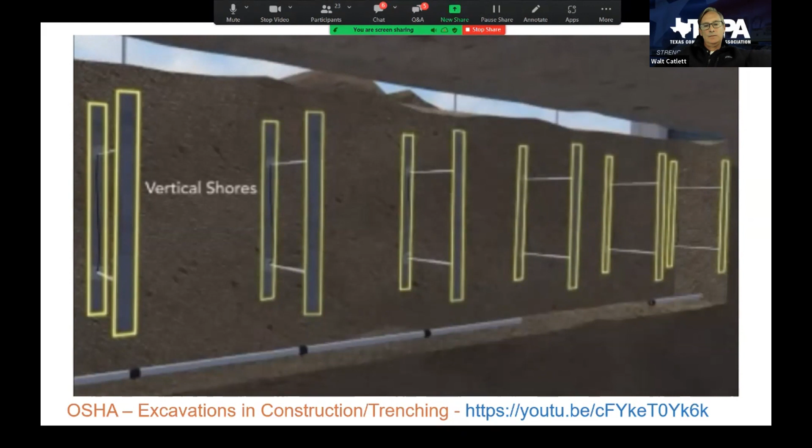If we use our example of a 3-foot wide, 10-foot deep, 40-foot long trench in Type B soil, the shoring system being installed would need to include 12 strong aluminum vertical shores, with 6 on each side of the trench. These shores, also called rails, will be connected by hydraulic cylinders every 8 feet along the length of the trench. A hand pump pressurizes the hydraulic cylinders until they fit tightly within the rails.

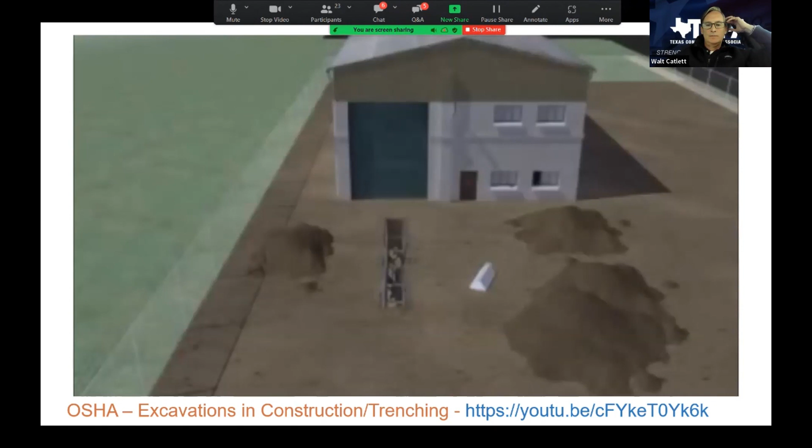Now that the shoring is in place, let's look again at the workers in the trench at the beginning of the video. As before, the workers are laying a sewer pipe into the bottom of a trench. But now the shoring system prevents the trench walls from caving in and keeps the workers safe. Sloping and shoring are ways to protect the sides of the trench so they don't cave in.

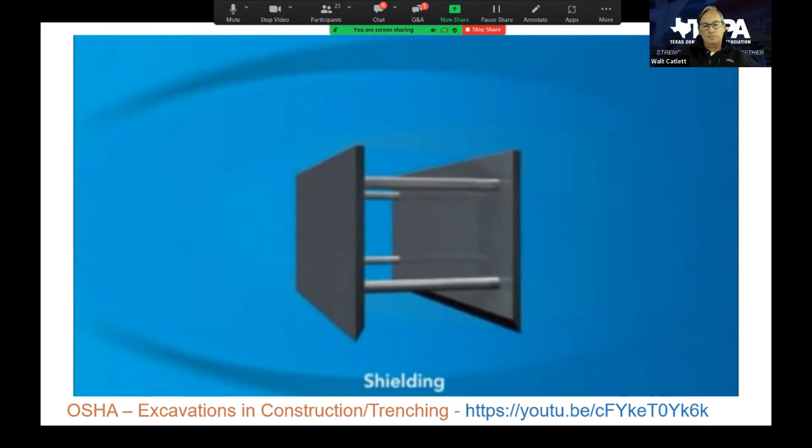Now let's talk about shielding, which is a way to protect the workers when they're inside the trench. Shielding involves using trench boxes, also known as trench shields, or other supports to protect workers inside a trench from collapsing soil if a cave-in occurs. The competent person should pick a trench box that is right for the soil type and all other site conditions.

A trench box has 2 large plates, which are held apart by 4 horizontal cross members. These plates, or shields, must be between the sides of the trench and the work area. The shields are strong enough to protect workers inside from a soil collapse.

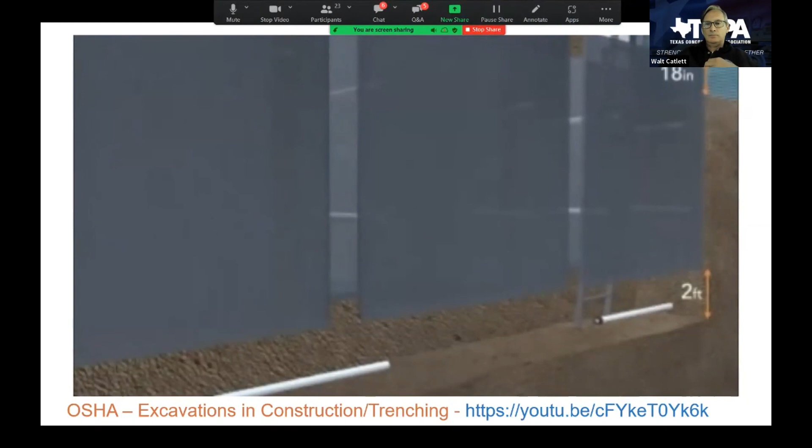The shields can be 2 feet above the bottom of the trench, as long as they can support the entire depth of the trench and there's no caving under or behind the shield. The top of the shield should extend at least 18 inches above the level of any materials that could cave into the trench. Trench boxes are typically used in open areas, but they can also be used with the sloping methods discussed earlier.

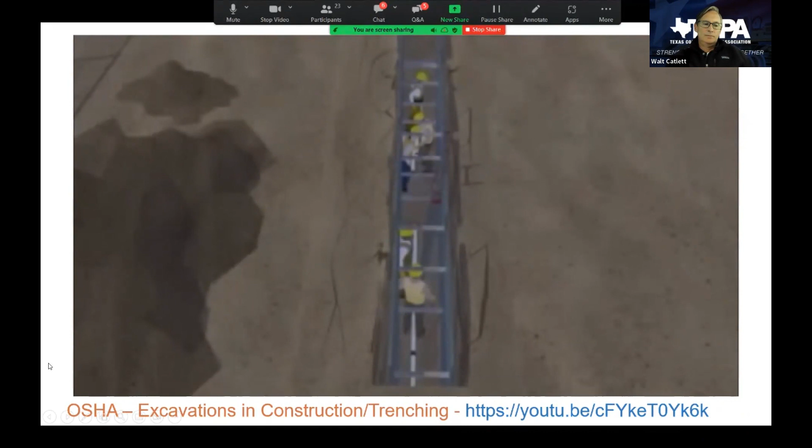So let's see how a trench box could have saved the workers that we saw at the beginning of the video. For our example, we'll assume that the workers are in a trench with type C soil and no sloping, but working inside a trench box. This time, as the workers lay the sewer pipe into the bottom of the trench, they are protected from any possible cave-ins. This example shows the importance of employers following OSHA's excavation standards to ensure that workers are provided with a safe workplace.

Okay. All right. That's another video that I like to incorporate into the training because it exposes us to another tool that OSHA provides. Like I said at the beginning and throughout, they've got a lot of good tools out there, whether it's a placard, a flyer, a poster that you put up in your workplace, multilingual, it's super helpful. You can find that video on YouTube, search OSHA protective measures, or go to that link I had at the bottom of the page. Here we'll just summarize real quick some of those protective measures, and we'll wrap this up real quick, see if anybody has any questions.

But they touched on in the video, shielding, shoring, sloping, and benching. In my line of work with pipe installation, what I see most of the time in the field are trench boxes, or a slope, or just a shallow trench with no protective measure required. But if they're using anything, it's either sloping or trench boxes. It's rare that I see shoring.

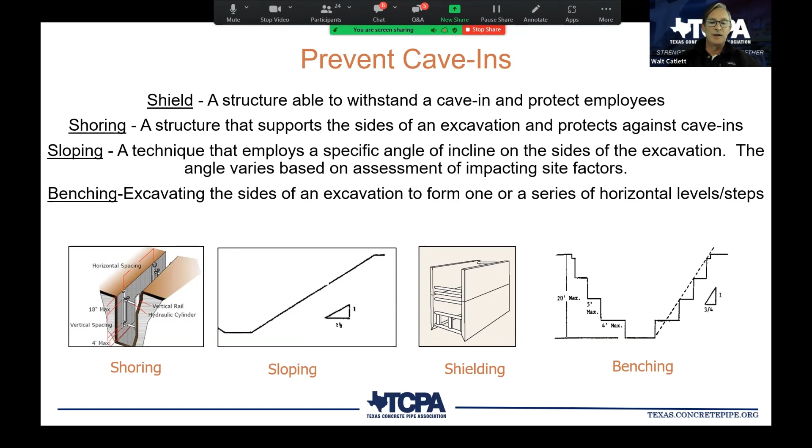So it's worth talking to the people you work with or contractors and ask what they typically do, if you're interested. A big item in selecting our protective system is driven by soil classification, which is why we went over that at the beginning. The depth of the cut, is there water content in the soil? What's the weather, what's the climate, what job am I doing? Is a trench box more suitable than shoring? If I'm downtown in an urban area, is sloping even an option? Is benching even an option? We've got to keep all that in mind.

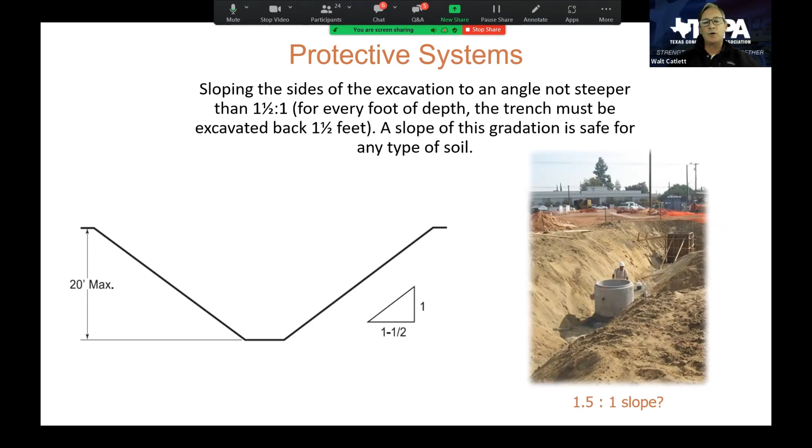And as we said before, 20-foot max. If it's greater than 20 foot, then we have to get a registered engineer to design our protective measures.

And we've already talked about one of our items, sloping. Y'all have seen this before. You heard him say 9 inches horizontal to every 1 foot depth for sloping for type A, and then type B is 1-to-1, and type C is 18 inches horizontal for every 1 foot of depth. One rule that's in subpart P of 29 CFR

1926 construction industry standard is what they call simple sloping for type A soil. They do allow, if the soil is type A and my trench is 12 foot or less, and my trench is going to be open no more than 24 hours, I can actually slope my trench at 1/2 to 1, so 6 inches horizontal to 1 foot of depth. It can't be 12 foot or greater in depth, and my trench can't be open more than 24 hours. That is in the standard, I just want to make you aware of it.

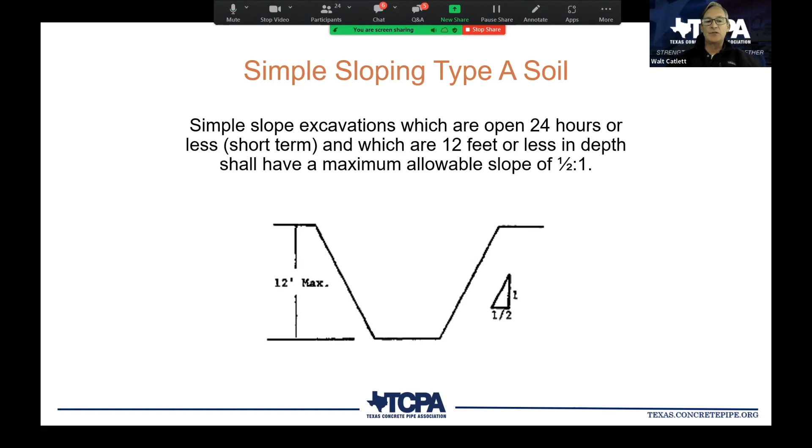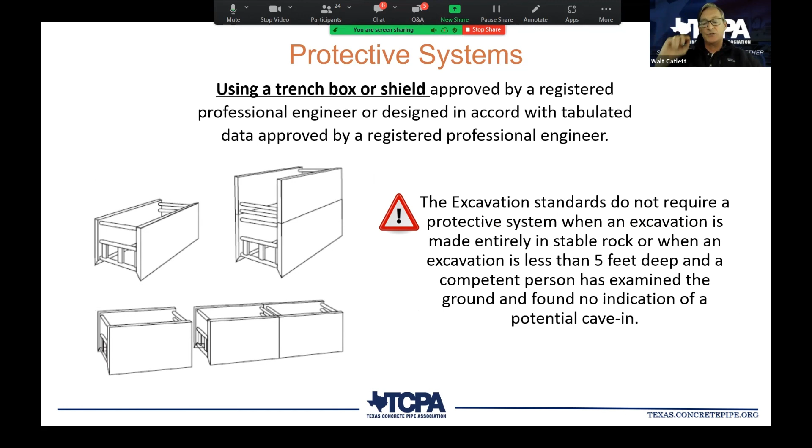benching. And then, if we're not sloping or benching, we're going to be doing shoring, or we're going to be doing a trench box. Here's a look at those. If we're using a trench box, remember it's got to be extended above the trench by 18 inches. And then, of course, soil type, strength of the supporting system, water, weather, all those come into play.

And then shoring, you heard them talk about hydraulic cylinders, timber or aluminum are the most common. What I hear from people who use this measure is it's more conducive, it's convenient - I hate to use that word - it's easier to transport to the field, and it's more applicable to what they're doing on their job site than a trench box.

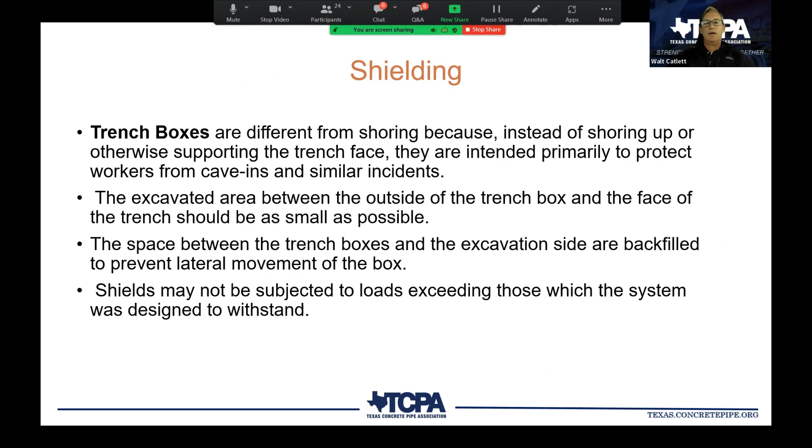Some other things to consider when it comes to trenches are other hazards that are in the trench. It's not just the trench wall sloping and falling and collapsing on top of a worker. There are other hazards. We've got, especially in Texas, some hazardous gases, some hazardous environments that you can create, and they can kill a worker or really damage their health.

So we've got to be conscious of that. Water certainly can be a hazard. When water gets in the bottom of that trench, it can erode the foundation for that trench wall, making it more likely to collapse on you, so you've got to keep that in mind. Vehicles zipping by a trench, heavy equipment, could end up in the trench, so we want to barricade that area off from people down in the trench so they don't get impacted by it. Just some additional hazards we should keep in mind.

And a big one is this: if you're going out into the field and inspecting a job site, one of the things he kind of glossed over in the training is that a spoils pile from whoever's excavating should be kept a minimum of 2 feet away from the trench wall. A lot of us will walk up to a trench and stand right at the edge with our toes hanging over, looking down at what's going on. Well, depending on who you are, you might be a 180, 250, 300 pound load bearing down on the column of soil on that trench wall.